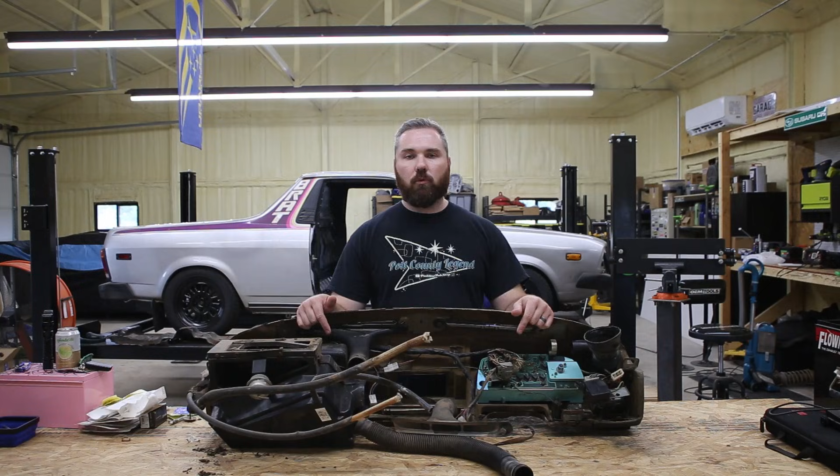In this video, we're restoring the dashboard in our 1981 Subaru BRAT that we're putting a modern day turbo engine in. So come along with me as we dive into this thing.

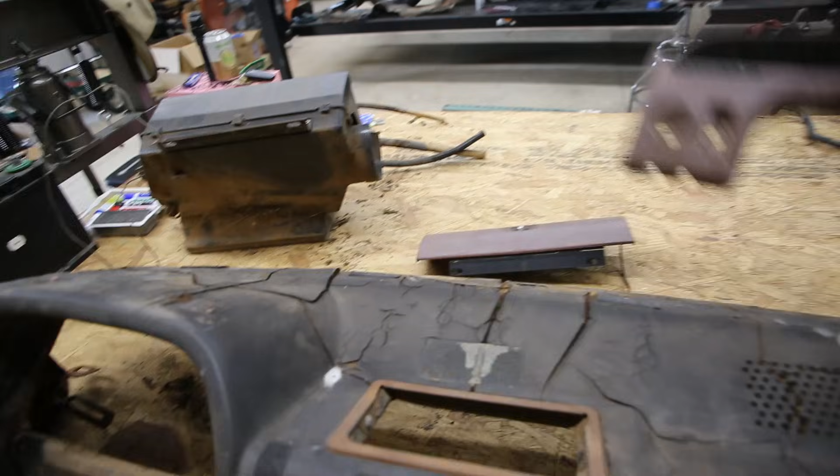Okay, we got everything off the dash. I'm gonna keep these shrouds, I think these look great. Got a lot of other cool little stickers on there - unleaded fuel only, do not shift drive selector while cornering. I think these are cool, they're in really good shape. Glove box, and then there's also a vent cover which goes over here, so we're gonna keep that original.

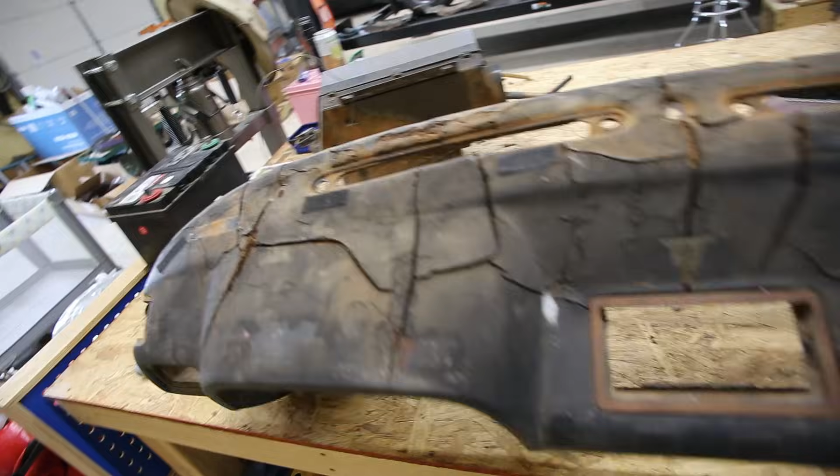The main thing to focus on is obviously the top of this thing. This thing is rough, this is pretty bad. I mean, it's just all cracked and rotted and separating from the metal frame. So we're gonna have to see what we want to do. A lot of people online will come in here with a Dremel and cut out all the cracks, fill it with foam, Bondo it and everything. I've heard those will crack too. A lot of people will do what I just said and then they'll put vinyl over it. So we'll just have to see what we want to do here.

I would love to 3D scan this and be able to 3D print a cover. Just do it! So get rid of all the foam and then print an actual cover over the top.

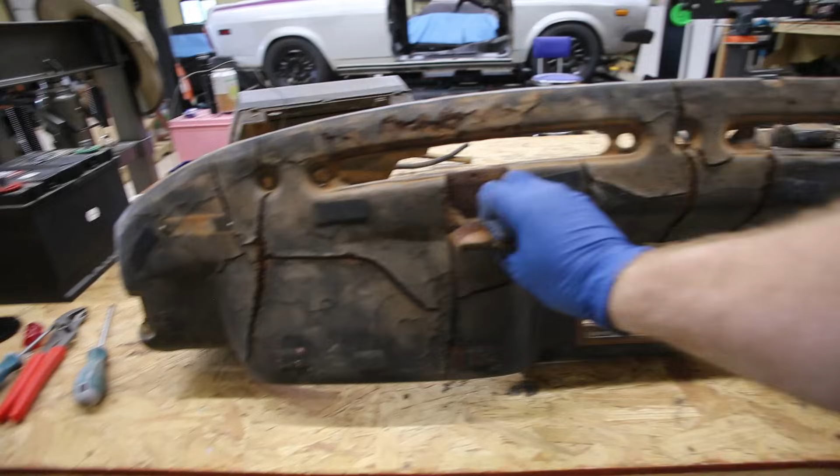That's an idea. I think if we look at this, it's just coming right off. Look at that. So the metal underneath is rusted in some spots, so we might just scrape off what will come off and then see what we are left with.

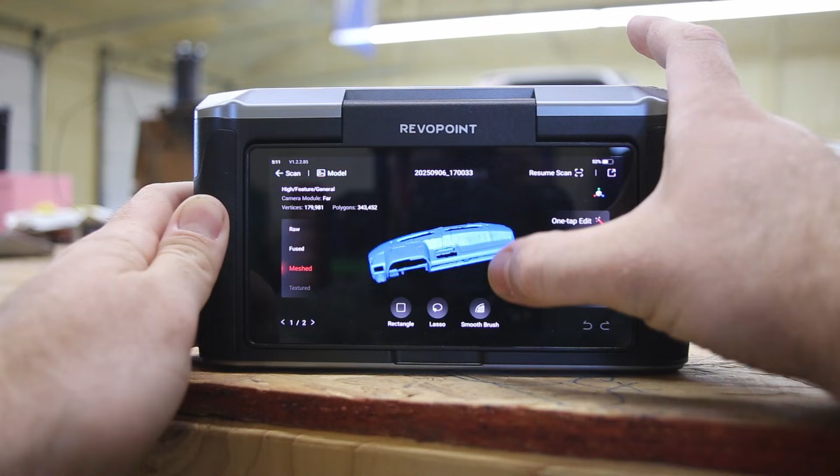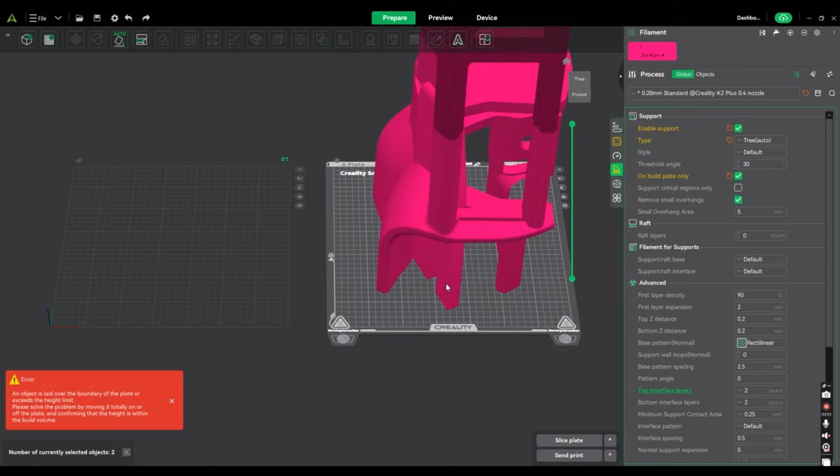Okay, so once we have the CAD model from Fusion 360, I imported it into Creality Slicer, which is the slicer I use with the Creality K2 Plus, which being a larger format printer, about 350 millimeters by 350 millimeters, this allows us to use the bigger volume to print this dash.

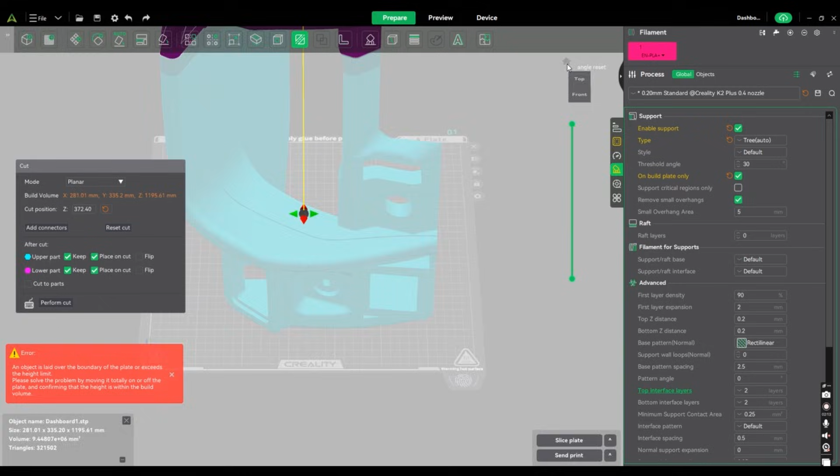We did have to break it down into about 4 pieces, and as you can see here, I'm using the cut tool within Creality Slicer to make those cuts. When you do make the cuts, you can opt to create different types of connections - there's a dovetail, there's the planar, and I just use the planar type cut. It also allows you to generate holes for alignment dowels, and we did that as we went through the process.

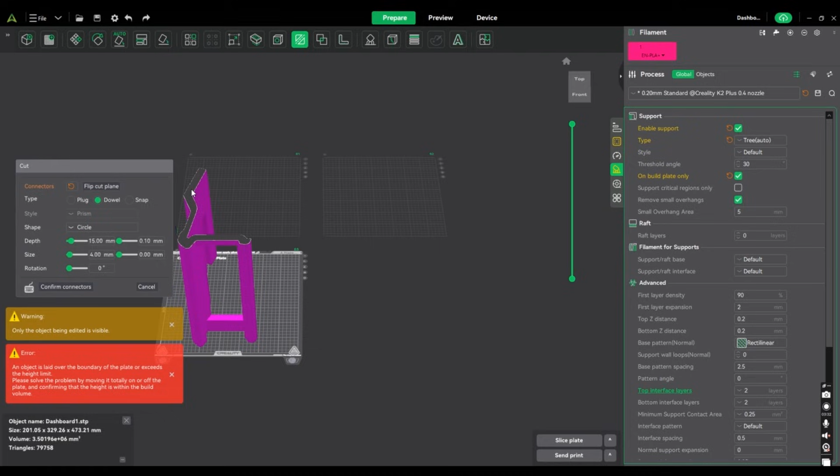So, like I said, we broke this down into about 4 different pieces to fit the build plate and then printed each one individually. As you'll see here later in the video, we were able to use the dowel pin holes to line everything up as we were assembling and gluing it all up.

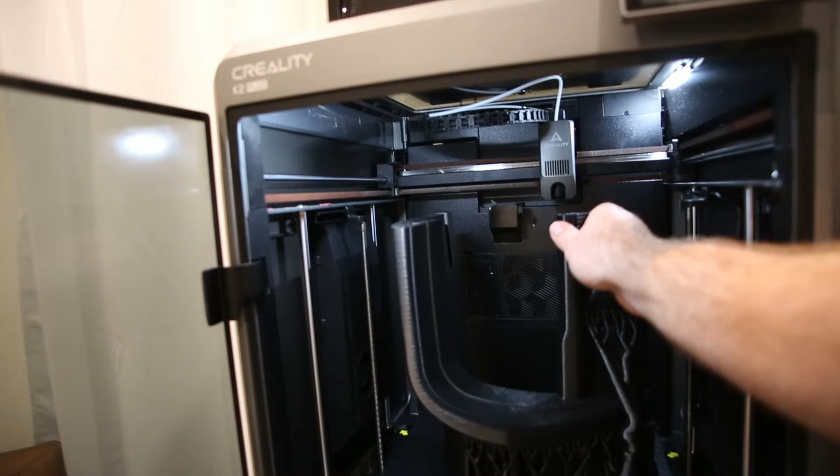All right, first piece is done. Check it out, here we go. See if we can get her off of the build plate one-handed. Let me set you guys down and we'll get this off the plate.

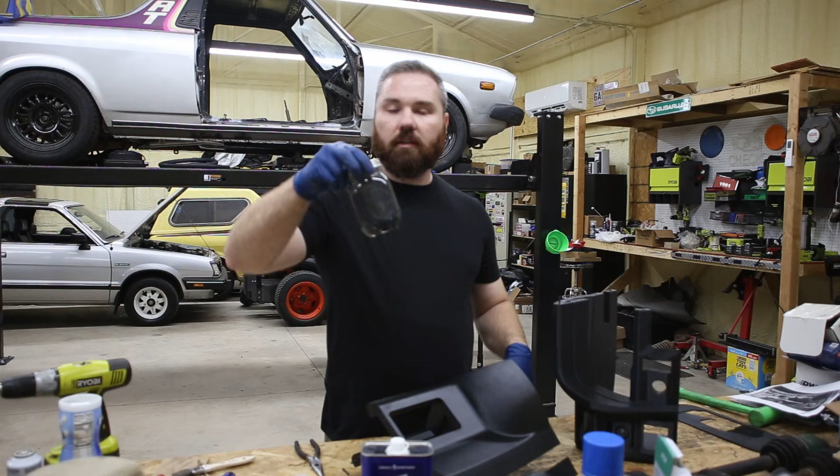Alright, so my research online tells me to mix up acetone with some leftover ABS filament. I just use the supports from all of this stuff, and this has been in there for a few days. It makes a pretty thick slurry. Use a little disposable brush here to bond these together. I believe the acetone has a chemical reaction with the ABS, which causes it to kind of melt together, creating a chemical bond, which seems to work pretty well.

I did do a couple test pieces, and I would say it's fairly strong. I do plan to reinforce the back of this with some fiberglass of some sorts. So this slurry is just a little thicker than the acetone would be on its own, is the best way to describe it. Not quite as thick as like Elmer's glue, like play school glue, but...

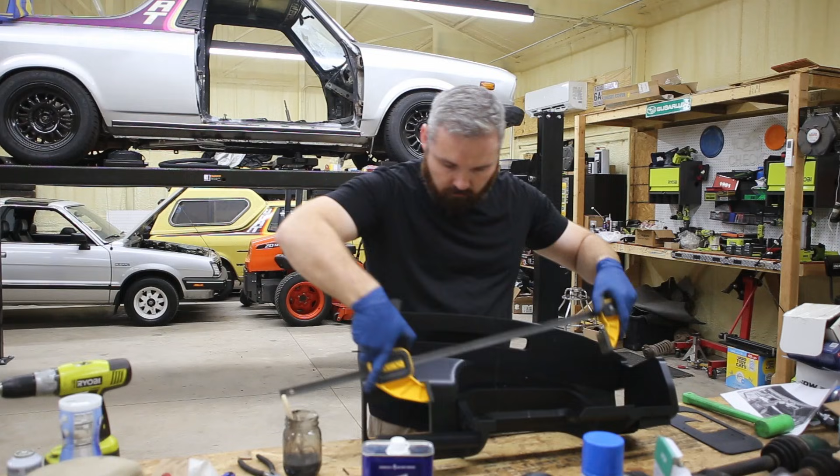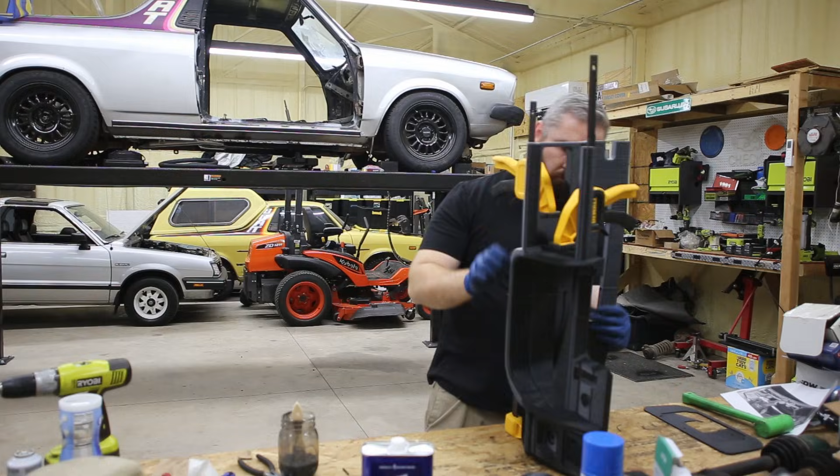Okay, so you can see where I've already put the acetone on. I mean, you really wouldn't have to go that broad, I just did a brush stroke across all the seams.

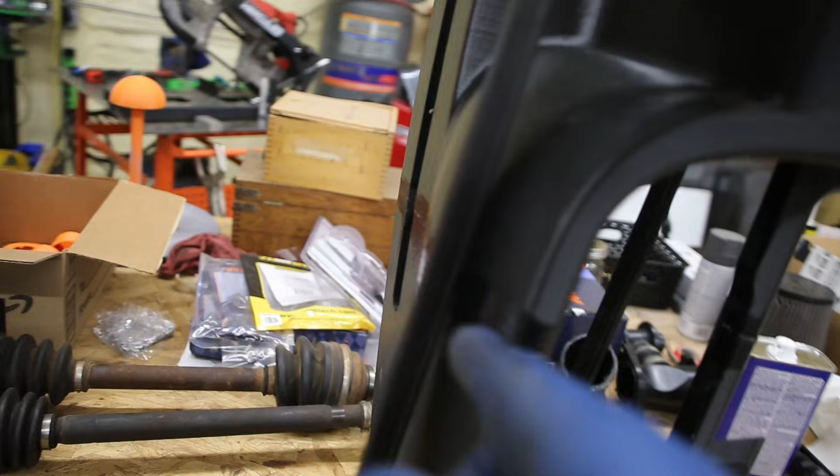I originally thought I might leave it in its 3D printed state because I do like the way it looks, I think it's a cool story. But as I get into this, I'm thinking a lot of these spots need to be sanded, textured and everything. So at least for this version of the dash, we're gonna go ahead and do all the seams, sand them all down, and then actually paint the dash. I've got some truck bed liner, hopefully add some texture. So we're gonna let this sit, I'll do the other part, and hopefully this will all be one piece by tomorrow.

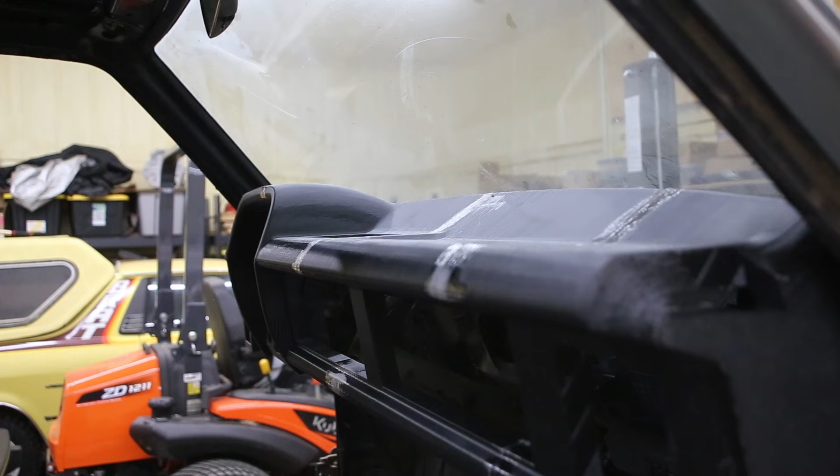All right guys, here it is, a 3D printed dash for a 1981 Subaru BRAT. Is it perfect? No, wasn't designed to be. It was really designed to see if we could actually pull this off, and we've answered that question, which is really cool. This is kind of where we're gonna stop for now on the dash.

I have a lot of unanswered questions, a lot of things that I wanna do to the inside of the car that I haven't quite figured out yet. I wanted to design the actual center console for this, I want all of that to flow. I don't know what texture I'm gonna go with or what finish, so I'm gonna let this kind of sit for a while.

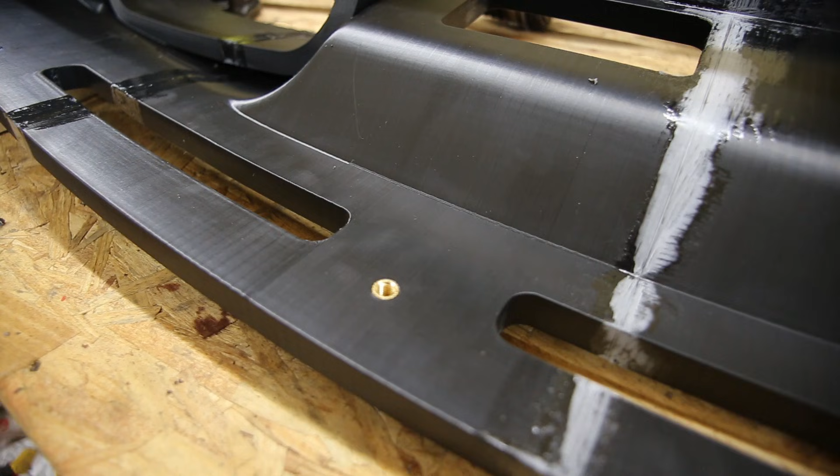It's ready to go. We did get all the nutserts in, the brackets, factory brackets are there, so this can be fully mounted. The IC7 dash does fit in here from Haltech, and so that's the dash we're gonna go with. I've 3D printed a bezel for this, so that'll fit in here. We still need to test fit like the vents and the glove box and all that, we'll get to that, but for right now, this is where we're gonna stop.

This is kind of the raw version of the dash. Look forward to the next video, should be pretty soon. We're finishing up the floor pan, center console area, shifter and all that. And then we're gonna be ripping out the engine, transmission, finishing up all the fabrication work. And then we kind of get ready for seam sealer, paint, all that, and get everything kind of finalized.